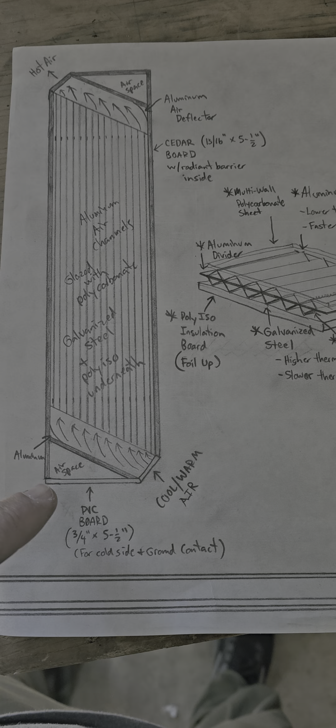Alright, so this is the design for a passive solar heater. You've got a box. Mine's going to be cedar. It doesn't have to be. At the bottom it'll have PVC board. Also does not have to be. This is a baffle. This is a piece of aluminum here. And that's to curve the air, because you want that airflow in that direction, right?

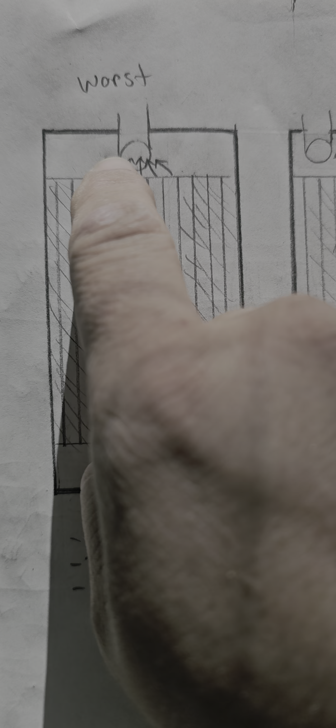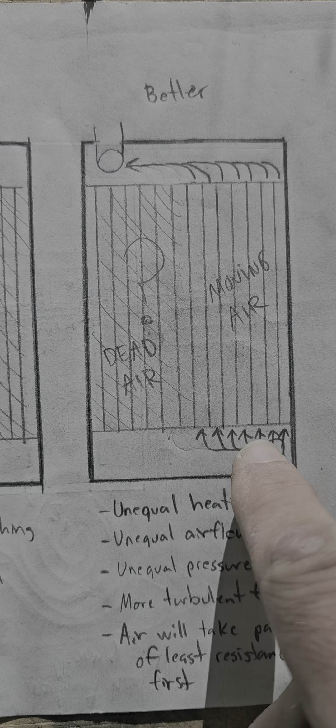So by angling this on both sides, you can see here, if you compare, usually people will put their inlet and outlet here, which of course means most air is just going to flow right through there based on the size of whatever the cross-sectional area of this is, and here it can basically all flow right through the middle, maybe a little bit of air over here, and this air really doesn't move at all.

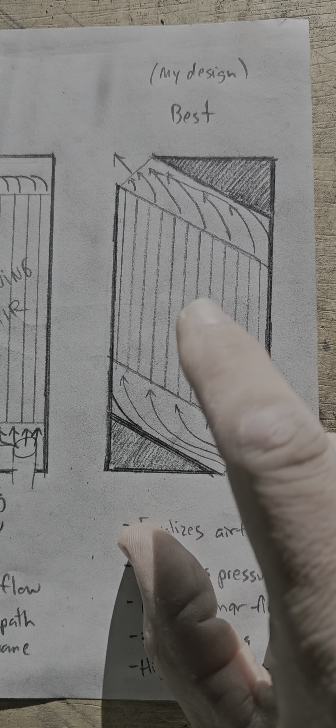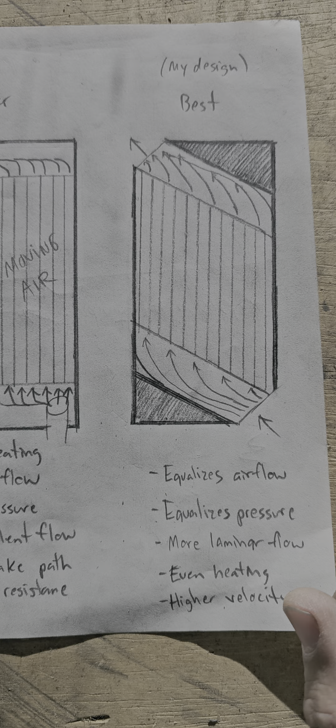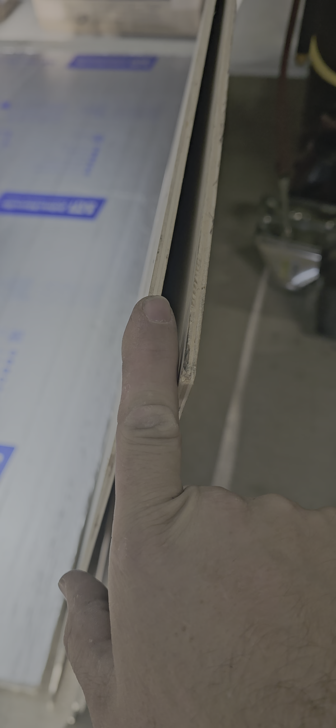Here, if they put it here and go out here, it still is going to first just go here, and then as the pressure kind of stabilizes, it'll make its way out into these other ones, and that's all dead. It's not doing anything. So here, yeah, it's gonna go here, but the pressures are going to be more stable here, and so as the pressure builds up here from this air, it basically just makes it all equal the whole way. And you just have to size these correctly, and maybe taper it or something, but that's the idea.

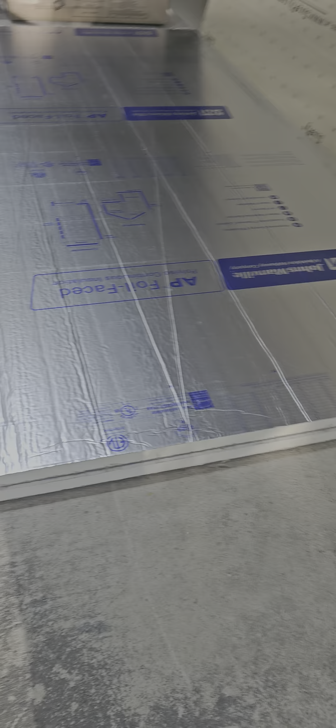So basically what you're gonna have is this board here. Most people use really thick plywood. I don't think that that's really necessary. So I'm just using this 1/4 inch board, a 1-inch polyiso foil backed. Doesn't really need the foil, it's not really a help, but polyiso insulation board. The reason for that is it has a 300 degree melting point versus like 200, and this thing could get pretty hot. We don't want it to get anywhere near that because we don't want it to melt. We don't want it to off gas poisonous gas.

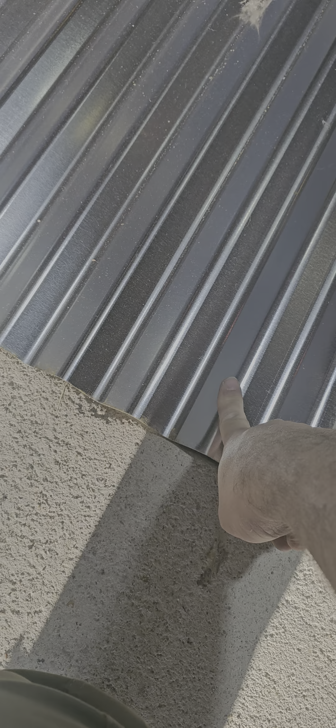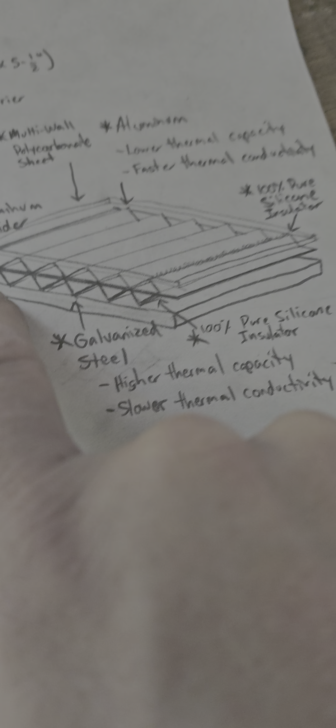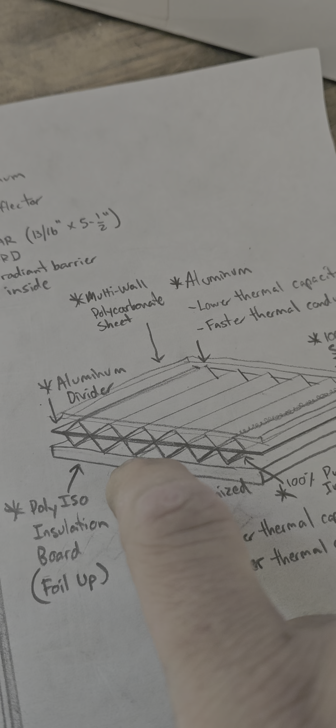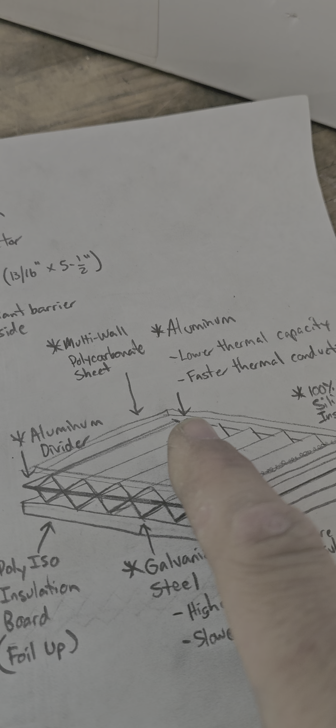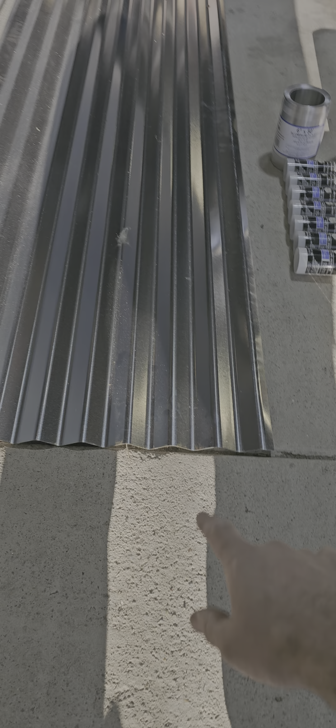If you look here, you have the insulation board, the galvanized steel, a sheet of aluminum, and then aluminum channels on top where the air will, really the air can flow through all of it, but the point here is that the sun is going to hit the aluminum, which is going to have a solar specific coating on it, right? So a high absorption, low reflectivity black paint essentially. And so it's going to absorb into the aluminum very rapidly, and it'll then hit that big aluminum sheet, and that'll just absorb more.

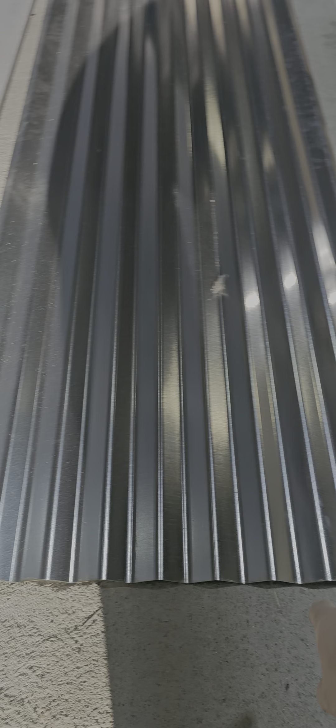It will then more slowly transfer that to the galvanized steel, and then a little bit obviously is going to go into the insulation and that wood as well eventually. But yeah, aluminum cools really quickly. So you want to store some of your energy in this so that, let's say a cloud passes over, you've still got heat you can pull off of that.

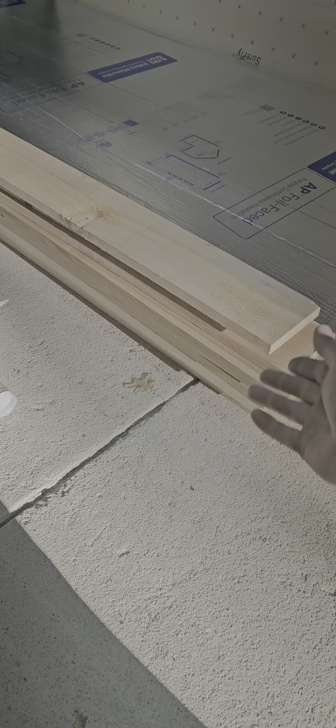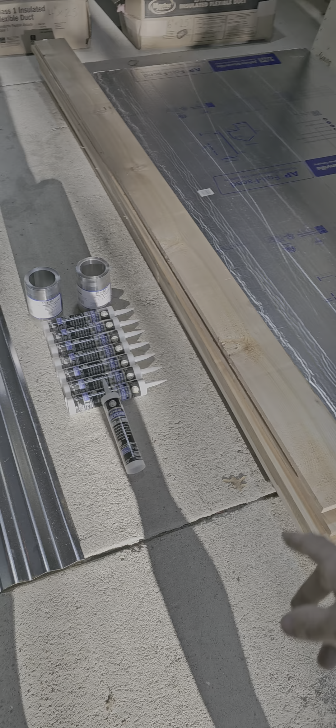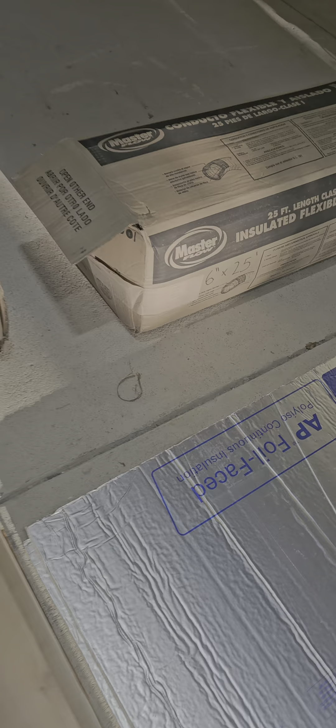PVC board just for the bottom of the box, and that's just so, if you lay it on the ground and it's in contact with ground, it won't matter at all. Cedar's pretty good as well, but I don't know, I just use that, so maybe if we're lucky, maybe we'll smell a little cedar. Probably not, but it's just a good rot resistant wood. And when I compared the prices, it really wasn't that much more.

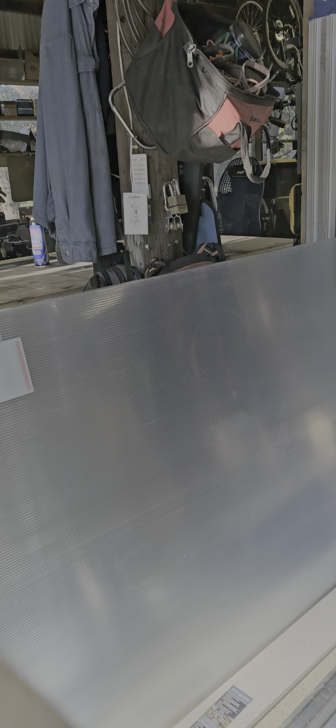You got a 4-inch inlet and a 6-inch outlet. That's for a reason. So just like in your car, your intake pipe is small, but people put on a bigger exhaust, because gas expands when it gets hot, air expands, right? And so you can lower the back pressure and help the convection that's going to be happening pull the air up and out, right? So just more naturally.

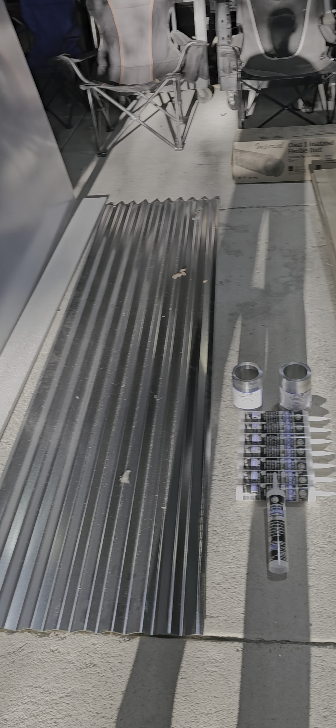Then you have this twin wall. So it's a 2-layer polycarbonate sheet. See if you can see that. So it's got these little channels. These will be sealed with silicone, so air cannot flow through. That'll increase the insulating value of these sheets. But they're twin wall. You can actually bend it. So we'll see. We might put a bend on this because they actually are going to diffuse light a bit. And what that means is it kind of scatters it, right?

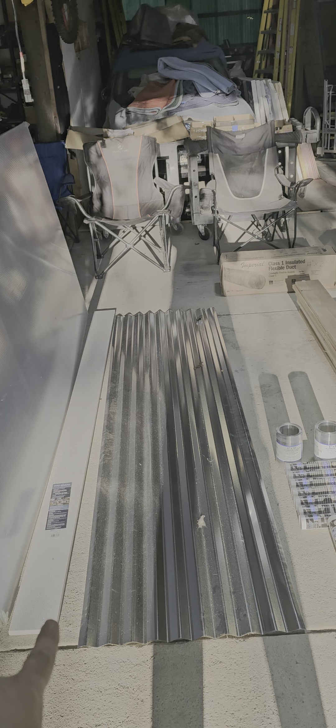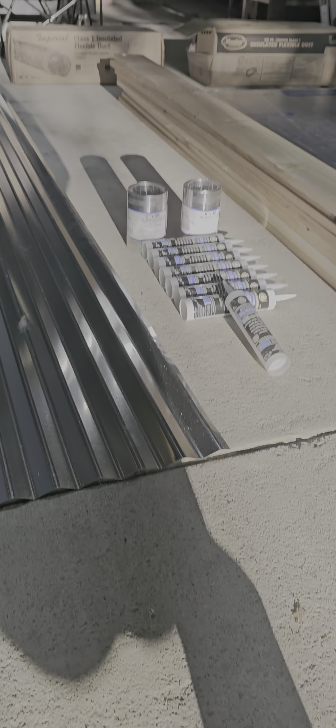And as the sun moves across the sky, it goes up and down as well. It's not always going to be even. So perhaps I'll curve that board over the top of this a bit, so that as the sun passes, it may not always have a perfect angle, but it should help diffuse light a little bit more evenly over this. So what I'm also going to do is take that aluminum flashing, cut it into strips, and make triangular channels, right? Kind of like this, but a lot steeper.

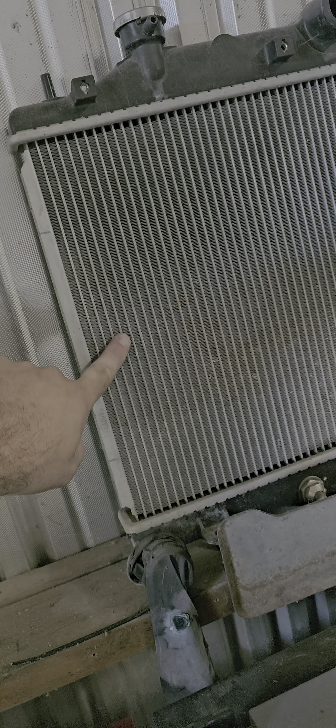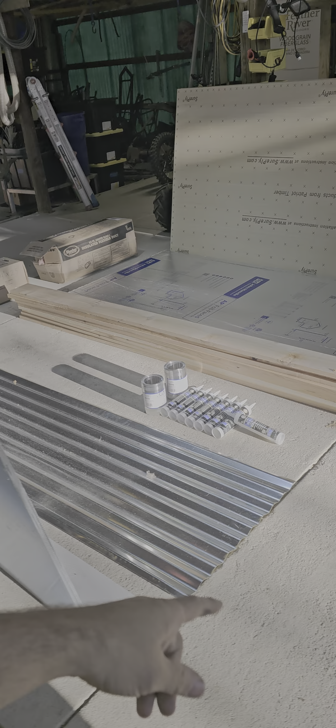Because what you want is the maximum amount of surface area for the air to come in contact with to transfer heat from the metal to the air, right? And so the aluminum does that faster than that. So we need as much aluminum as possible. So if you think about like a car radiator, can I show you one? I have one somewhere. Hold on. But anyway, you know what a car radiator looks like. All right. So air is passing through this, from one side to the other. And look how many fins. And that's so it's super duper efficient, right?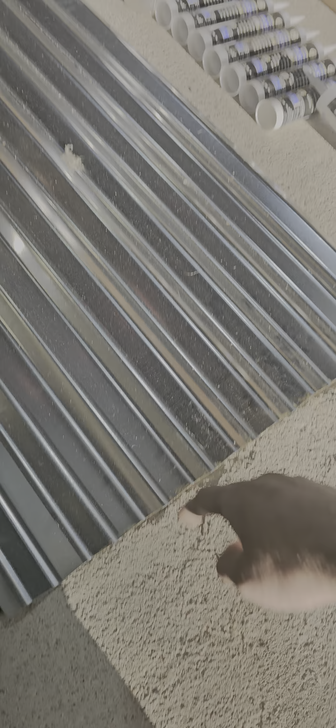Obviously I can't make that, but I got this brake. It's a sheet metal brake from Harbor Freight, $70. It's a 30-inch, so I'll take aluminum flashing, cut it into strips, put it in the brake, and bend an angle, and then I can make it stand up a little taller.

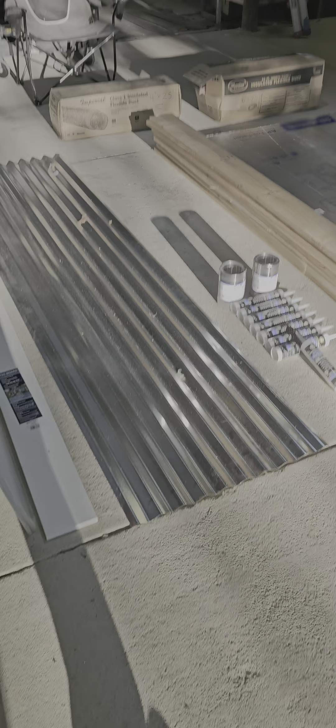So I'll just have to worry about, if you picture, let's say the sun is shining at this angle in the morning, it still has a decent angle. It could be at this angle, it has a decent angle, and in the midday, it's right here, it's hitting everything. So by using a triangular shape like that, it's a little bit more balanced output. There's more overall surface area, but by making these taller, shadowing could happen. So I'll have to find the proper balance for that. And then I might even curve the whole thing. I don't know, but probably not. I think a flat one is going to be better just throughout the whole day.

So, you've got east, southwest, basically, somewhere over there. The sun's tracking the whole way. Now right here is obviously not a great spot. I have a lot of trees. Trees are not good for solar, but it's not for me. So it changes angle quite a bit. And in the winter, the sun is just super low. I mean, it's not even winter, it's fall, and the sun's right there. It was like right there at the worst, or the best. So you gotta take all that stuff into account. Anyway.